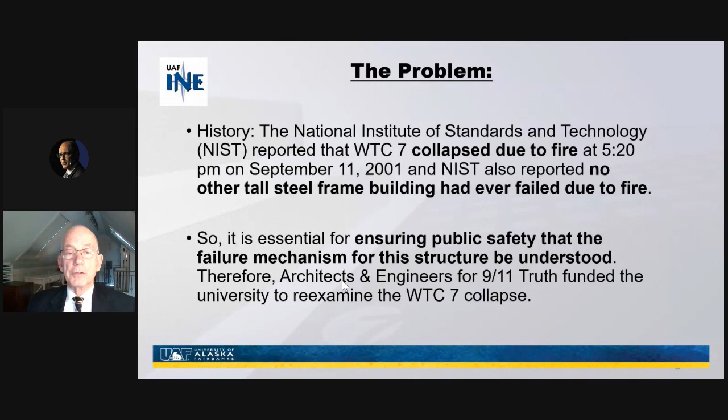So it was essential for public safety that we understand the failure mechanism of this structure. And since the NIST report said that it had failed due to the unprecedented event of office fires, Professor Hulsey understood that this was a matter of supreme importance for our profession. The science behind the study was first examine the fire loads, which were supposed to have caused the failure on floors 12 and 13, and then determine how the building was going to react to the thermal loads. And secondly, rule out scenarios that couldn't have caused the failure. And third, identify the type of failures and locations that could have contributed to the observed collapse.

He used the same material properties that NIST used in their report to ensure that the input values for the materials would be the same.

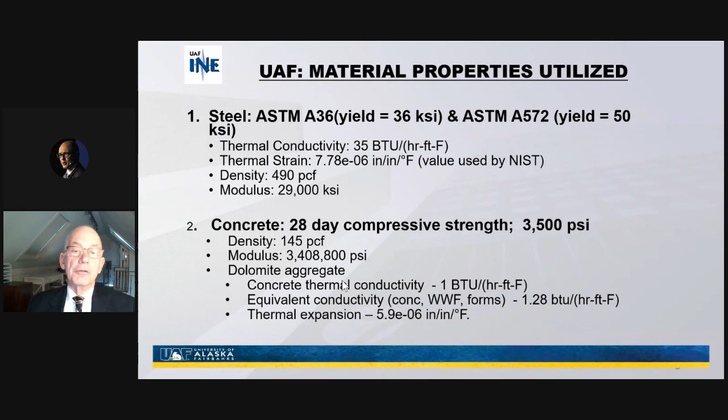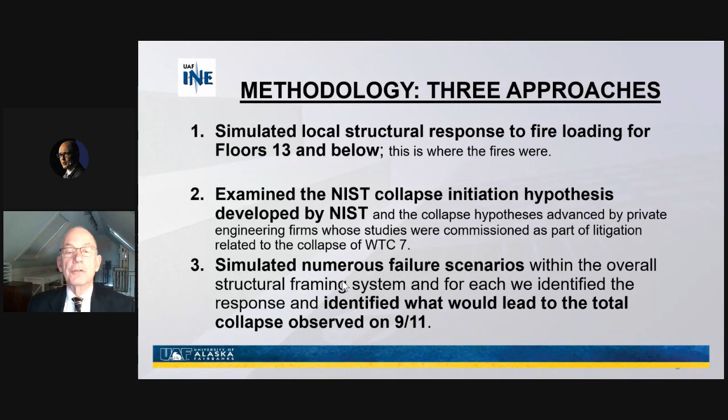First, he simulated the local structural response to fire loading to floors 13 and below, which is where the fires were. Then he examined the NIST collapse initiation hypothesis and the hypotheses advanced by the private engineering firms whose studies were commissioned as part of litigation related to the collapse of the building. And third, to simulate the numerous failure scenarios within the overall structural system that could have possibly led to the total collapse as it was observed.

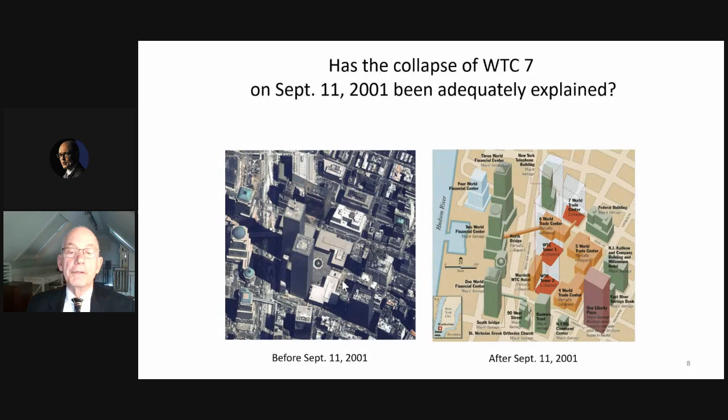The buildings and their relationship to one another are shown here: the towers, 1 and 2, the North Tower and the South Tower, and Building 7, which was a 47-story structure to the north of Building 1, about 350 feet to the north of the first tower. The reports that have been issued on the Building 7 failure are these.

The FEMA report, which was a preliminary assessment, was issued in May of 2002. Then NIST, which was given the power by Congress to issue a report on the cause of the failures, issued their report on Building 7 in November of 2008.

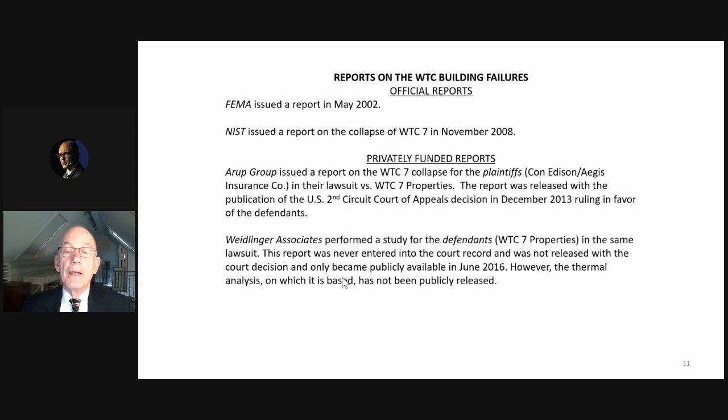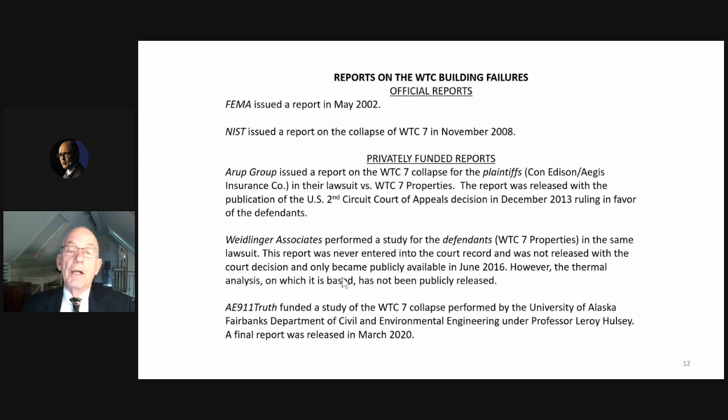Then the Arup Group was hired by the plaintiffs, Con Edison, as a result of the fact that the Con Edison substation, which was built underneath Building 7, was damaged. They sued World Trade Center 7 in 2010. Then Weidlinger was another engineering firm which defended the World Trade Center properties in that same lawsuit. Their report, however, only became available in June of 2016 without their thermal analysis. And then our report, which was issued yesterday.

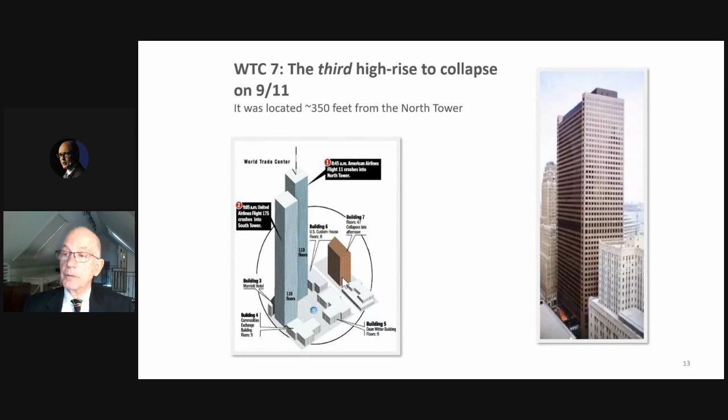The World Trade Center 7 building was the third high-rise to collapse that day. The location of the building was about 350 feet from the North Tower. It was 47 stories high. Each floor had about an acre of area. It was a trapezoidal floor plan.

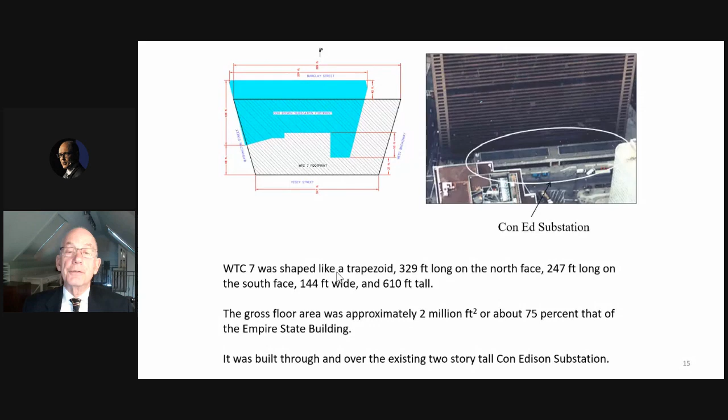The gross floor area was about 2 million square feet, and it was built through and over the existing 2-story tall Con Edison substation. It contained 82 columns in its floor plan, 58 on the perimeter, 24 in the central core.

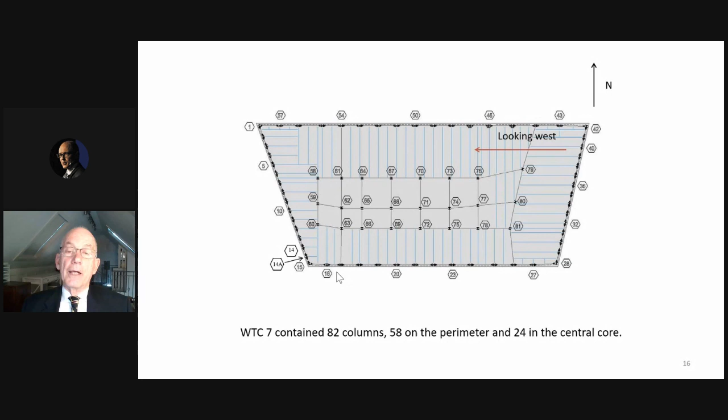We see that layout here. The area of interest is in the northeast corner of the building where the red arrow is. That is the area that NIST identified as the place where the initial event causing the collapse took place.

We'll take a look at that here in a photograph taken at the time of the construction of the building. Looking west from that corner, we see the girder of interest, which is determined to be called girder A2001 in the plans. And we see the beams coming in from the east side of the building, framing into the girder.

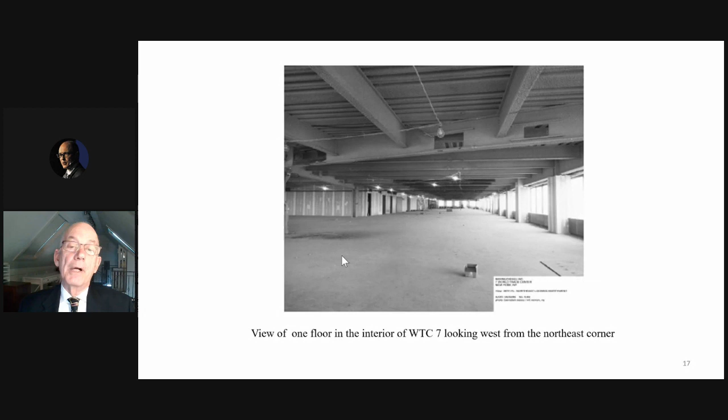This is a plan of the foundation showing the caissons supporting the Con Ed substation and the connections of the beams and columns of the World Trade Center 7 building to those caissons.

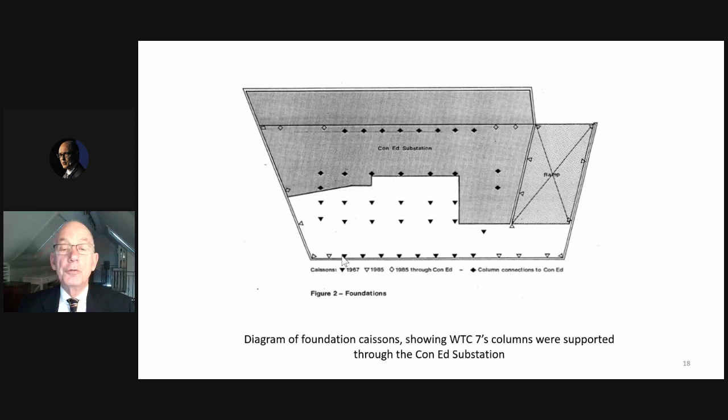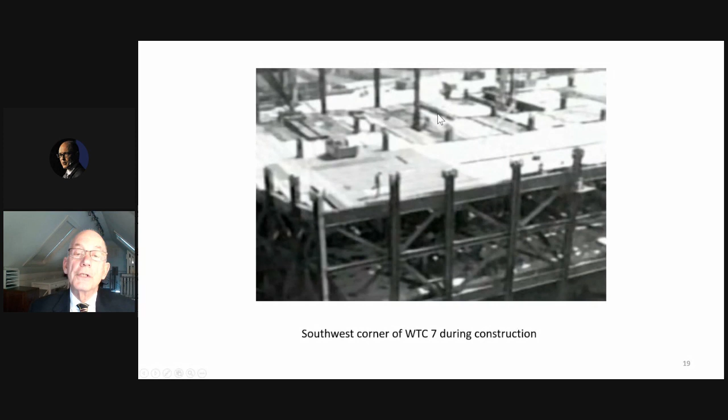A photograph taken during construction. We can see the perimeter columns here on the outside, the girders connecting those columns, the framing, and above that, the core columns coming up through the floors in the area of the elevators and the stairwells.

The 610-foot tall building, which was not hit by a plane, collapsed that day in the late afternoon at 5:20 and turned into a 5-story pile of rubble in about 7 seconds.

I want you to look closely at the top of Building 7 there. We see some areas here that contain heavy equipment for the climate control. This is the east penthouse, of particular significance, which we'll talk about later. This is the west penthouse. We're looking at this from the south. Pay particular attention to those features of the building.

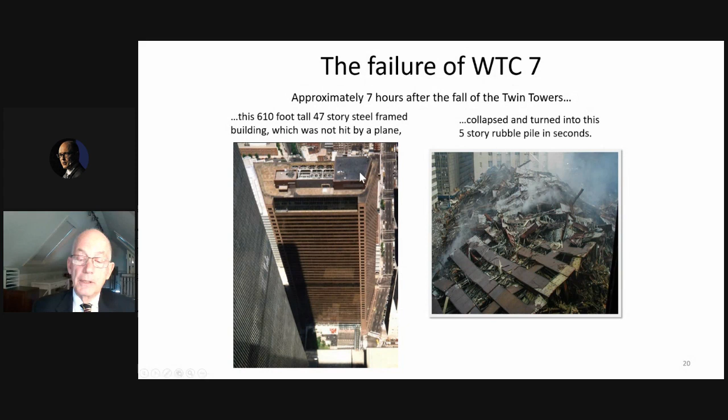Now we'll take a look at what it looked like when it came down. These videos start after the east penthouse had already collapsed, because if you look at the top of the building there, you'll see that the east penthouse has already disappeared through the roof. In all these videos, until we get to later in the presentation, you won't see the east penthouse because it collapsed first.

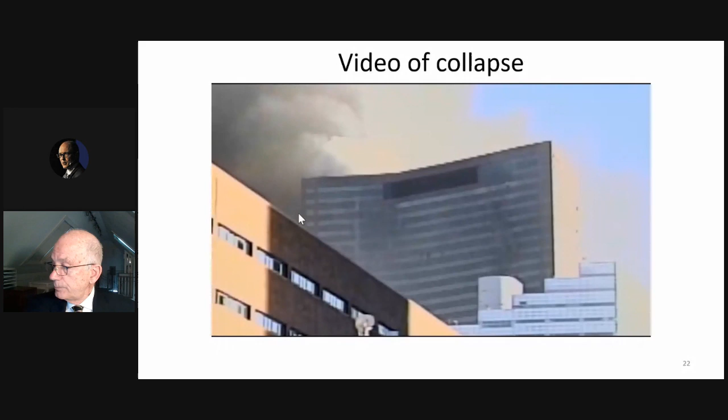For the third time today, it's reminiscent of those pictures we've all seen too much on television before, when a building was deliberately destroyed by well-placed dynamite to knock it down. Did they actually use the word brought down, and who was it that was telling you this? The fire department, and they did use the word: we're gonna have to bring it down. We heard this sound that sounded like a clap of thunder, a shockwave ripping through the building, and the windows all busted out. About a second later, the bottom floor caves out. The building followed after that, and we saw it crash down all the way to the ground. I turned in time to see what looked like a skyscraper implosion, like it had been done by a demolition crew. The whole thing just collapsed down on itself. It was almost as if it were a planned implosion. It just pancaked.

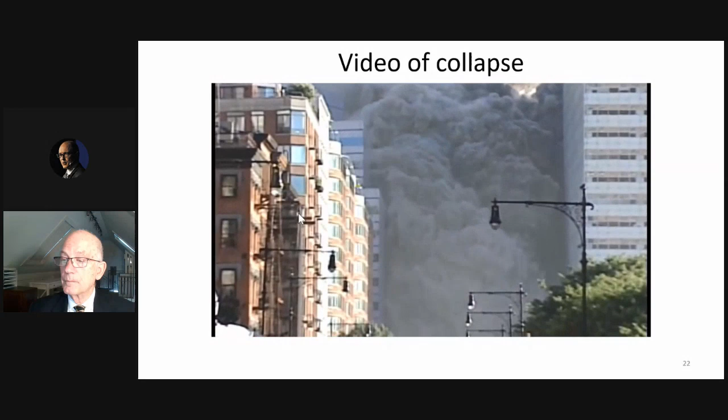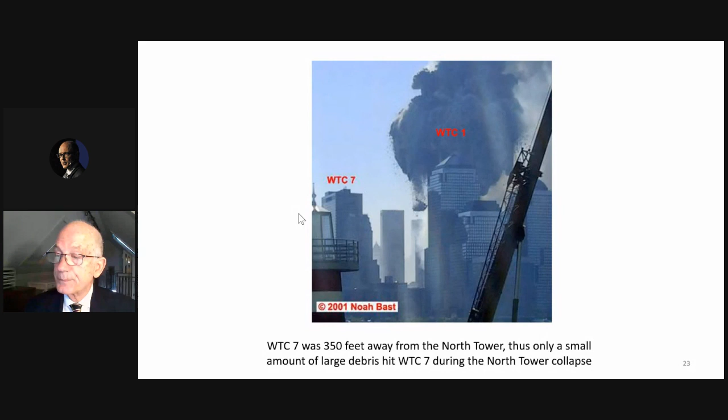Here you can see the relationship of World Trade Center 7 to World Trade Center 1, which is collapsing as this photo was taken. The debris pile from the two towers is shown here in a FEMA debris map, and we can see that World Trade Center 7 was hit by some light debris on the south face of the building.

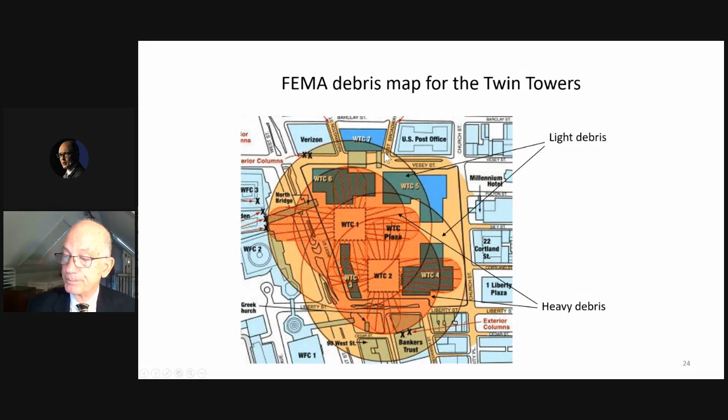Here's FEMA's, or NIST's, representation of that damage. The damage in the lower southwest portion of the building is the area where the fires started, and it was presumed that the impact damage caused those fires to start. However, NIST stated that the debris damage from the towers did not affect the collapse in any way.

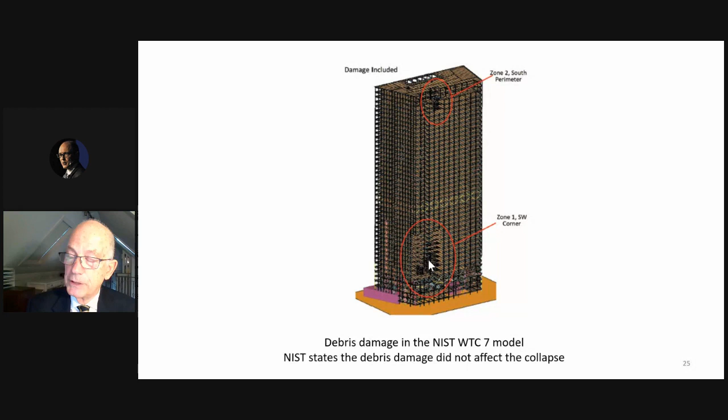The fires themselves, at first, FEMA thought they were maybe caused by diesel fuel in the building, which would be used for the backup generators. That was later disproved. Most of the diesel fuel was found in tanks underneath the building.

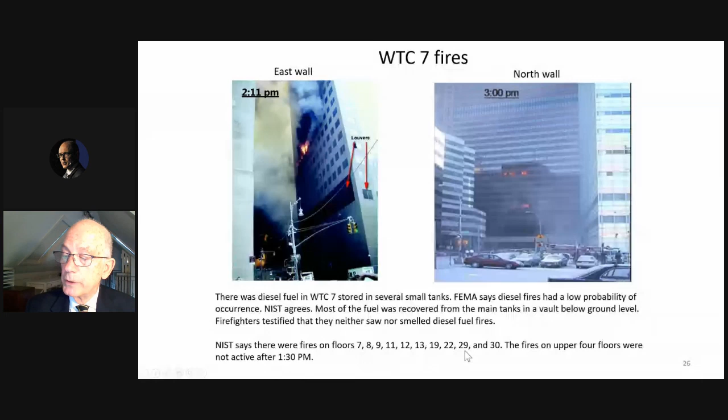We note, and we agree, that the fires of concern were on the 7th, 8th, 9th, 11th, 12th, and 13th floors. The fires higher up, on the 19th, 22nd, 29th, and 30th floors, were out shortly after they began. So the NIST World Trade Center collapse theory looks like this.

On floor 13, these 5 beams in the northeast corner of the building were heated by the fire. They pushed on girder A2001, which ran between column 44 and column 79, off of its seat—or in some scenarios, they have an alternative, which we'll discuss, maybe pulled it off. So they say it was either pushed off or pulled off its column seat at column 79.

That caused the girder to fall, and it hit the floor below, hitting the same girder underneath it on the 12th floor, breaking it loose. Fire damage also contributed to other beams in that area failing at the same time. That left column 79 unsupported because the floors cascaded down all the way to the 5th floor.

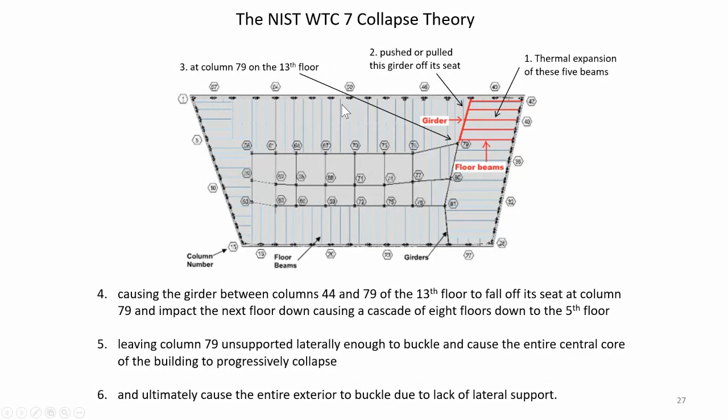So then you had a long unsupported column with a heavy load on it. It buckled, and that caused the entire core columns to fail in a progressive manner, which led to the failure of the perimeter columns, and that's what caused the building to collapse. So that's the NIST collapse theory.

They said it was all due to the office fires, shown here in this photograph. You can see the fires have burned on the 8th floor. They've apparently come in from the west, and they're burning in the central area of the building now. There were some on the 7th floor—you can see where the windows are busted out.

On the 12th floor, you can see the fires apparently started on the east side—here's the east side—here's column 44, and they've burned their way to the west. On the 13th floor, there are fires still active at this time, about 3:50 p.m., roughly an hour and a half before the building came down.

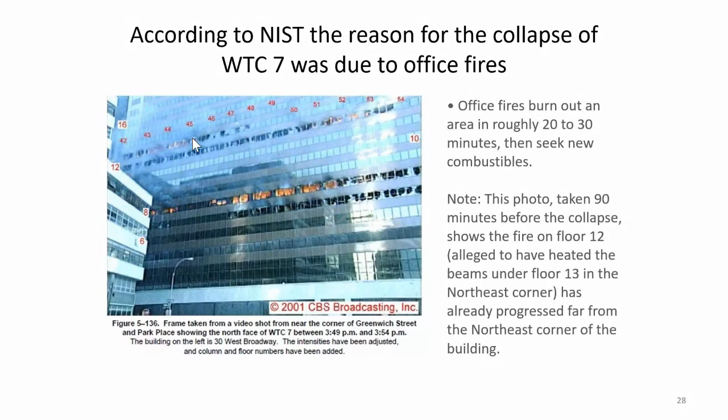According to NIST, that girder was considered to have lost its vertical support when its web was no longer supported by the bearing seat. The bearing seat on column 79 was 11 inches wide, so that when the girder end at column 79 had been pushed laterally at least 5.5 inches, it was no longer supported by the bearing seat.

However, the drawings showed that the plate was actually 12 inches wide, not 11 inches wide, and NIST later admitted that when they were informed of it.

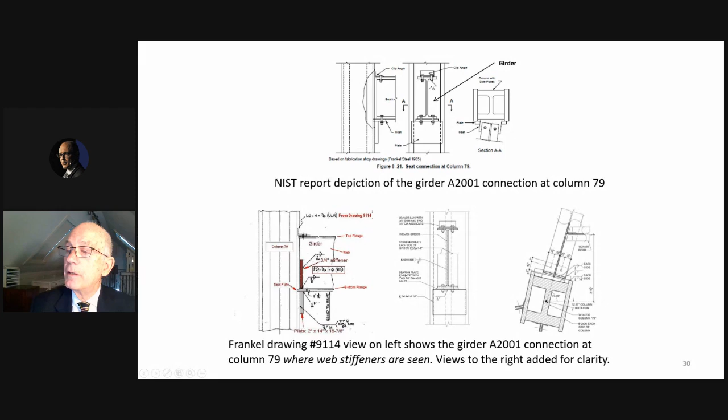Now, the NIST depiction of the girder sitting on its seat is shown here. We see the web of the girder sitting over the base plate, with some clips attached, and the plan view here shows the column with the girder coming in, sitting on the seat.

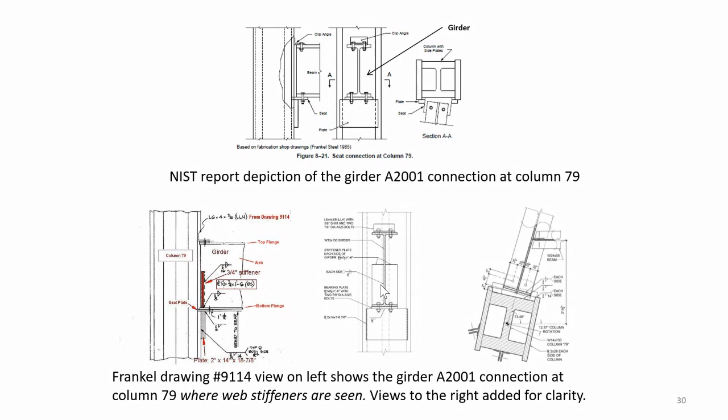However, there's a problem with their depiction: there were stiffeners welded to the end of the girder, welded to both the web and to the lower flange. This is the actual construction drawing—the Frankel drawing—that shows there were indeed stiffeners welded to the end of the girder. This makes a huge difference in their analysis.

This is a pictorial view of the same thing: the support plate, the base plate, the girder, the beams pushing on it, and the stiffener plates, which were welded to the web and the lower flange.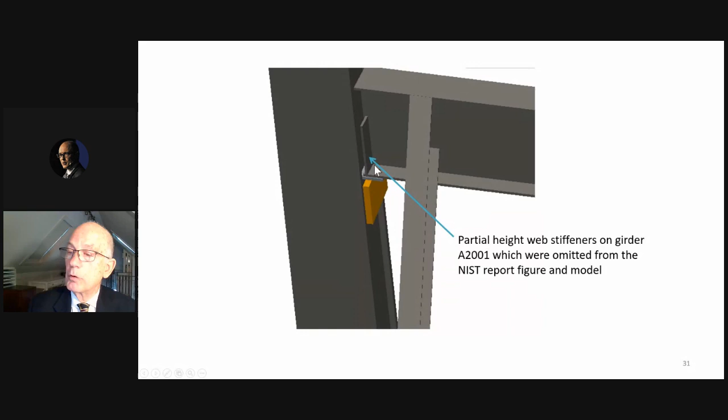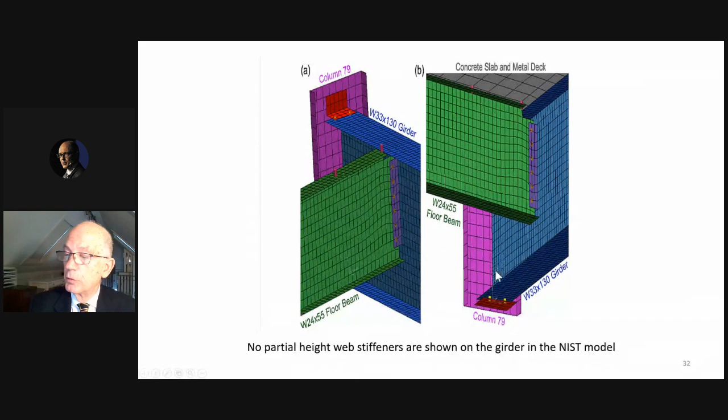In the NIST presentation, this is the beam, the girder, and the column—again, the girder and column here—and there are no stiffeners shown. They did not include them, but we know they were there. Construction photos show that they were there. This is column 79, with the beam, girder, and stiffener plate clearly shown in the photographs.

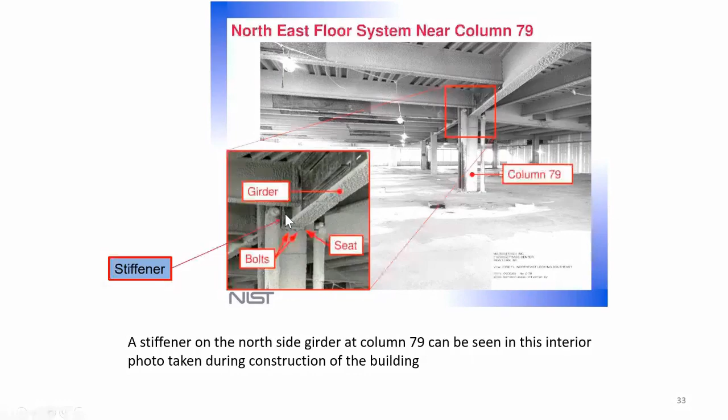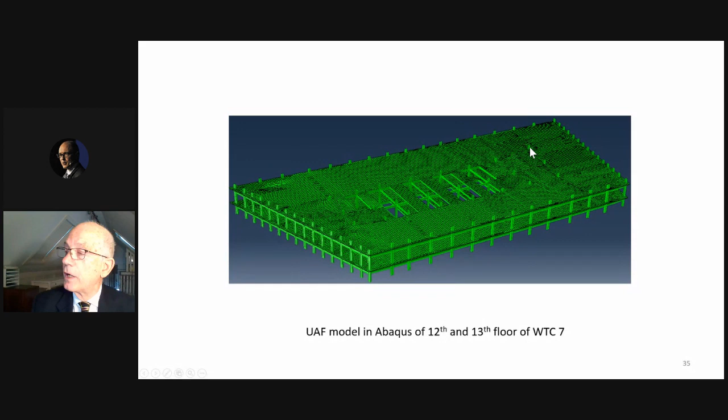Now, when Professor Hulsey and his crew did their finite element modeling of the building, they started with a model in Abaqus of the 12th and 13th floor. Here's the northeast corner, perimeter columns, the core columns, the elevator shafts and stairs, and here's column 79, located here.

Here's the UAF finite element model of that northeast corner of the frame. You can see column 79, column 44, girder A2001, the 5 beams that frame into it from the east, and the perimeter columns.

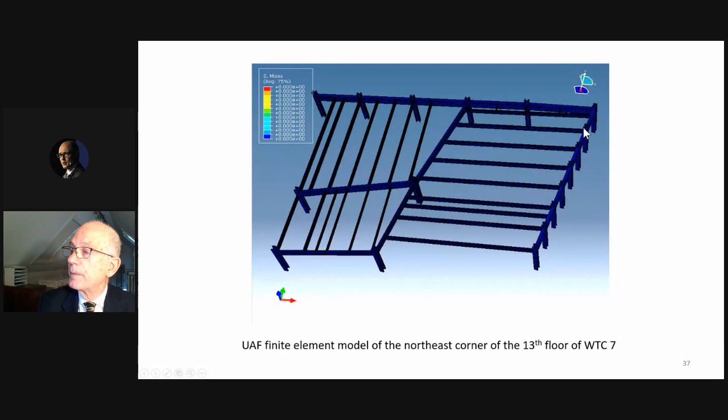The finite element analysis that they ran showed, here we're looking at the critical point, the point of initial failure according to NIST. This is the girder, the beam that frames into it next to column 79. Column 79 is not shown for clarity. We see the seat plate that was attached to the column, and the stiffener plate that supported it, the support plate. Here are the stiffener plates, which were welded to the web and to the lower flange.

The UAF analysis showed that even if we allow the beams to push the girder well past the corner of the support plate, the lower flange does not fold up and allow the girder to fall. This depiction shows the beam pushed well beyond what it actually could have, because in order to get the girder pushed that far, the UAF had to increase the coefficient of thermal expansion of the beam by 40%, which is unrealistic. But they were trying to get this girder past the seat to find out what happened. They found out the girder would not fall because the lower flange would not fold up.

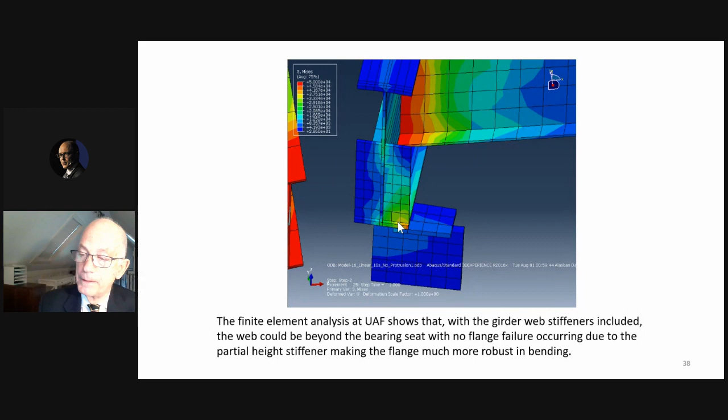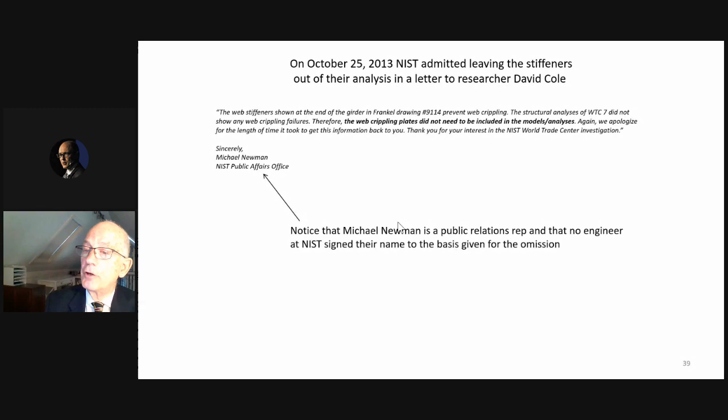This invalidates the initiation event that NIST says caused the entire event. NIST later admitted leaving the stiffeners off of the girder. One of our researchers, David Cole, sent them a letter, and they sent back a letter saying the web stiffeners shown at the end of the girder prevent web crippling. The structural analysis of World Trade Center 7 did not show any web crippling failures. Therefore, the web crippling plates did not need to be included in the models or the analysis.

This letter was signed by the head of their public affairs office, Michael Newman. Michael Newman is not an engineer. No engineer would sign that document, I'm quite sure, because they would lose their license if they went on record saying that the web stiffeners would not have any effect on the flange stiffness.

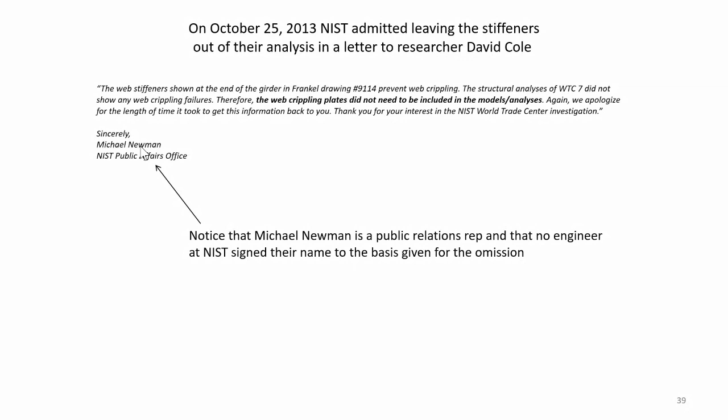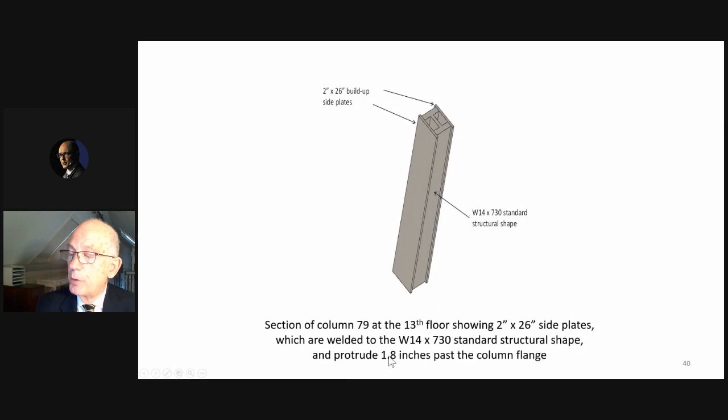Other problems are that column 79 and all the columns had built up side plates 2 inches thick that were welded to the column at every floor connection. They protruded 1.8 inches past the flange of the column. So when you heat the beams and the girder, NIST's model said the girder was heated to 500 degrees centigrade, therefore it would expand, pushing it up against the flange of the column.

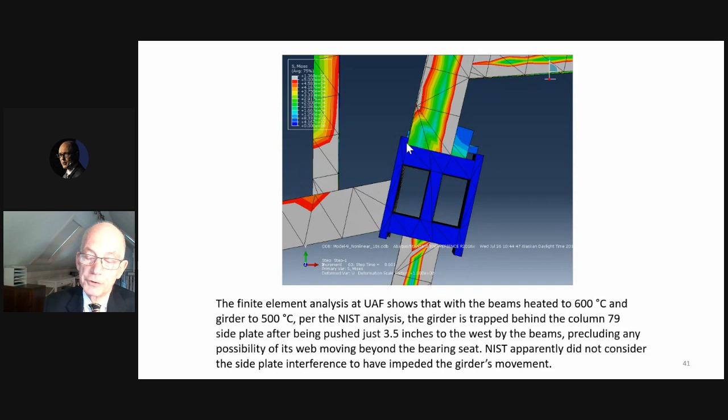And when the beam attempted to move it to the west, it would get trapped behind the side plates. For some reason, NIST, although they showed the side plates in some of their drawings, does not give any explanation for how the girder could have cleared the side plates and therefore come off of the support plate. So that is another serious problem with their analysis.

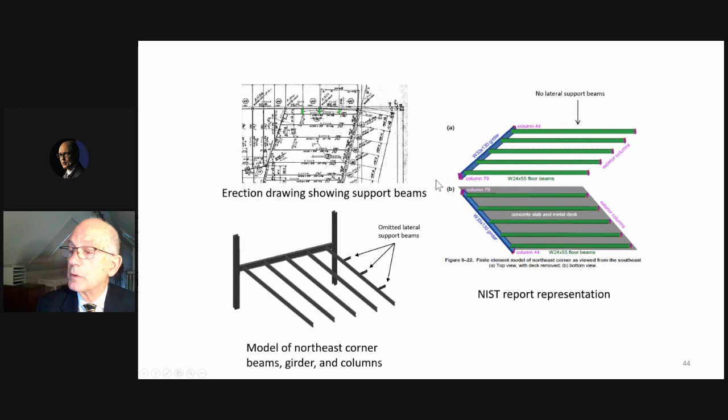Here we see another problem, that they left off these lateral support beams. Going back to the beams in the northeast corner, the northernmost beam had 3 stiffener beams that kept it from buckling between it and the exterior girder. So the NIST representation shown here, a bit harder to see, here's column 79, and these are the beams. This is column 44, and there are no support beams shown here. So even though there were 3 support beams, they were not shown in the NIST analysis.

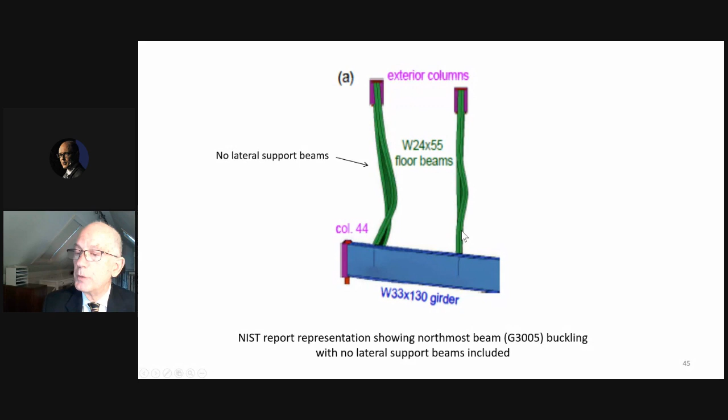What that means is that when NIST heated the floor, that beam buckled, and the other beams adjacent to it also buckled. The UAF report confirmed that if you left off these 3 beams, this northernmost beam would buckle when heated. I think the reason NIST needed that piece of information omitted is because they also claimed this girder could have been pulled off its seat at column 79, caused by the shortening of the beam due to buckling, and the cooling process would have perhaps drawn the girder off the beam to the east instead of pushing it off to the west.

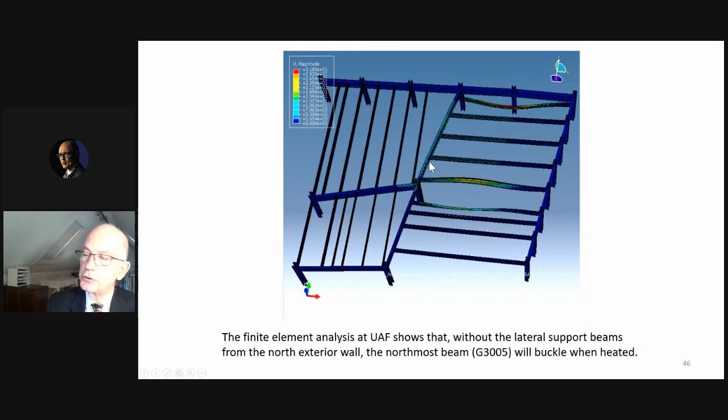The UAF analysis showed that when you left those 3 beams in there, the beam didn't buckle, and therefore the girder would not have been pulled off to the east.

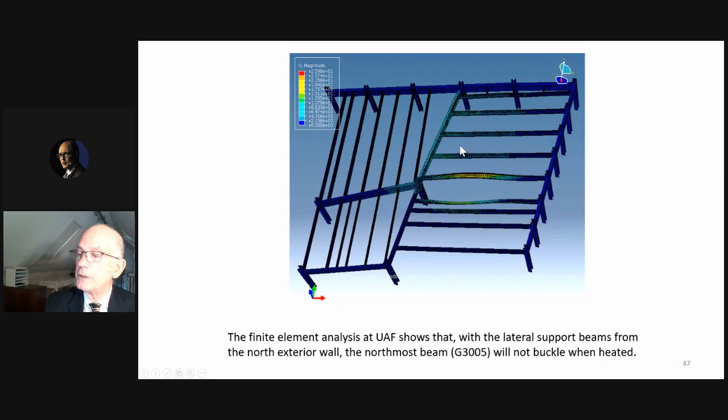But UAF went even further and said, okay, let's assume somehow that the girder could fall. What would happen then? NIST says the girder would fall down, hit the girder below it on the 12th floor, break it loose at its connection, and cause that section of floor to fall, leading to a cascade of floors all the way down to the 5th floor. That would cause column 79 to be unsupported for all floors between 14 and 5, causing it to buckle due to lack of lateral support. Now, the analysis everyone agrees with is that for this connection at column 79 to break, the impact force of the girder above hitting it would have to be 632,000 pounds. That's what it would take to break the welds loose and cause the 12th floor girder to collapse.

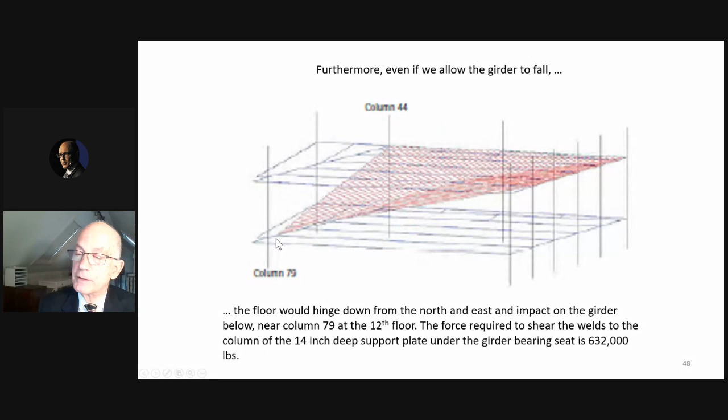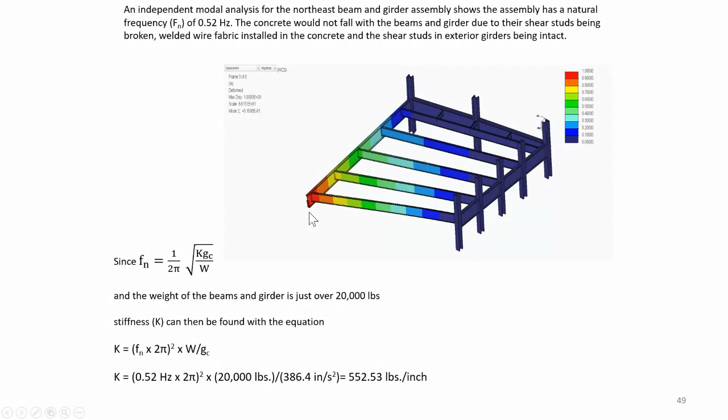So the UAF did a modal analysis of that framing section. Here we see it again, here's column 44, here's beam A2001, the 5 beams. They let it fall, let it hit the girder below on the 12th floor, and did an analysis. After figuring the stiffness, frequency, and running through all the calculations, which I won't reproduce here, they only got a force of about 62,000 pounds for that girder hitting the floor below. That's only about 1/10 of the 632,000 needed to break it. And if you heat it up to the temperatures NIST says it was heated to, that force is reduced to about 48,000 pounds.

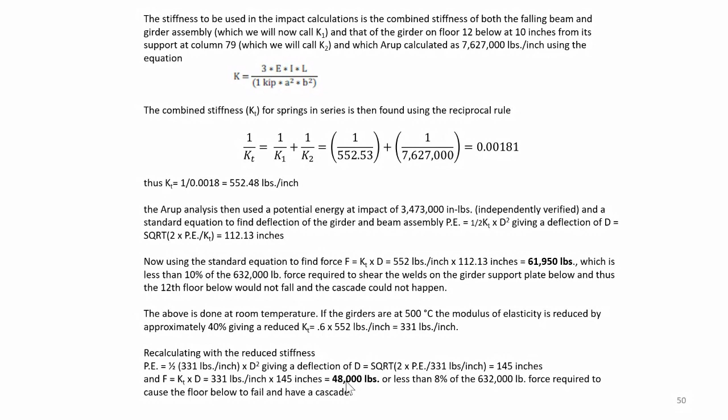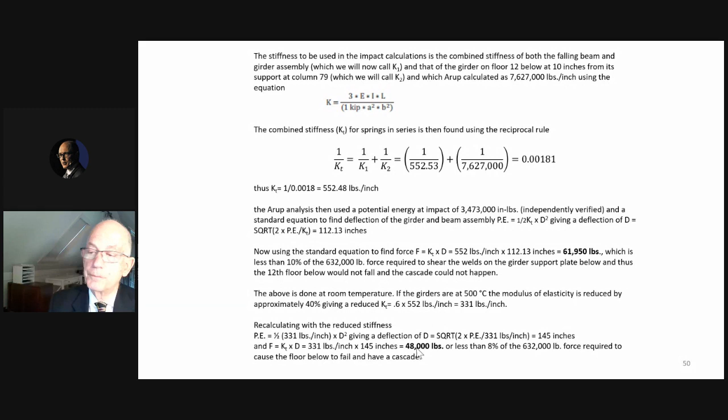So the conclusion is, even if the initiating event somehow could have occurred, which we know it can't, it couldn't have caused the next event in the progression. Remember, they claimed this was a progressive collapse. First event, girder coming off the column. Second event, the girder causing the girder below it to break loose. Both of those steps have been shown to be impossible.

Now, the linear static analysis that UAF ran took this scenario, the NIST analysis, and said, okay, let's go to the next step. We look at these columns and take them out, saying they buckled between the 14th floor and the 5th floor. Then we take out the next columns that they say collapsed next to them in the core, columns 76 through 78, and see what happens.

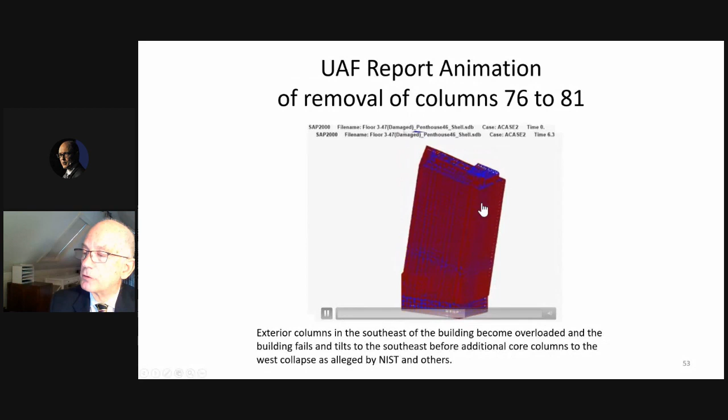What happens is this: the collapse of those 6 core columns overloads the perimeter columns in the southeast corner of the building, causing the building to collapse by tipping to the southeast and falling over. This would be what that looks like. So the collapse scenario, the third step in the progressive collapse NIST is proclaiming, would have resulted in the building tipping over and falling down, not falling straight down into its own footprint. Notice again that the east penthouse is still intact in that scenario.

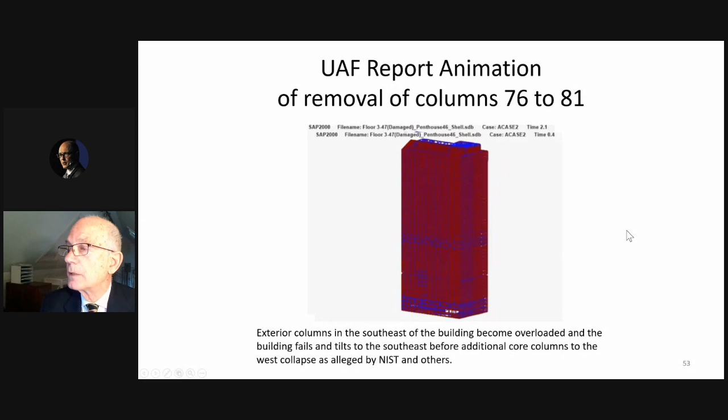Let's see if we can get this to move on. Now, the UAF also did a global collapse animation in which they tried to get the building to act as shown in the actual footage. This is what that looks like. The east penthouse collapses first, then the west penthouse, and shortly after that, the entire building comes straight down.

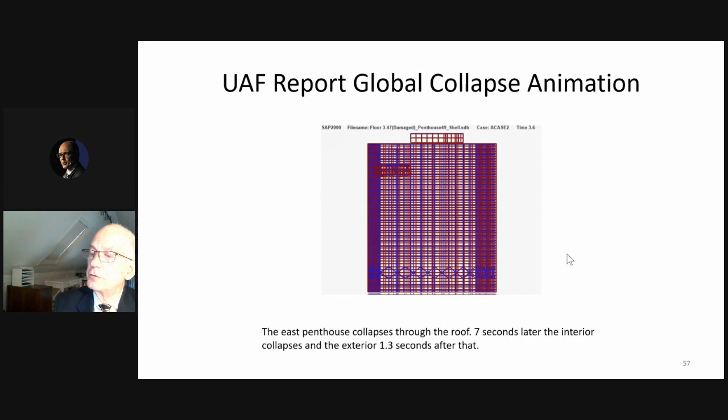The UAF finite element model was able to reproduce the actual collapse mechanism to a very close proximity. Here's another look at it from straight on, looking north. They only got this to occur by taking out all the interior columns over 8 stories low in the building, followed 1.3 seconds after that by the perimeter columns.

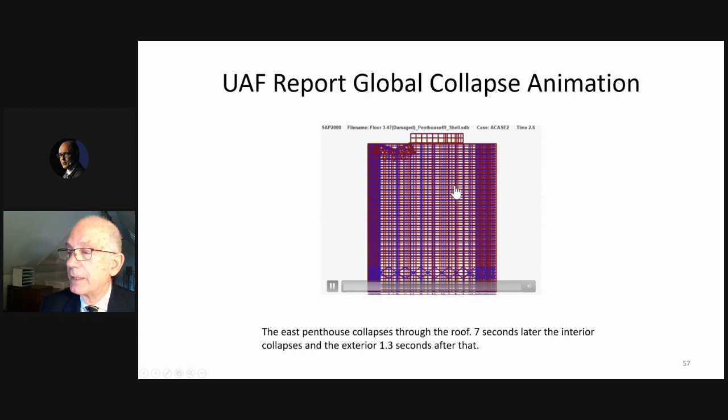That was the only way they could imitate the actual event. In addition, prior to that, they had to take out the 3 columns, 79, 80, and 81, high in the building as a separate event to get the east penthouse to come down first. Then the core columns caused the rest of the building to come down. So there's the upper floors under the east penthouse, then the core columns down low pull down the west penthouse and cause the entire building to collapse. That's the only way they could replicate what we saw.

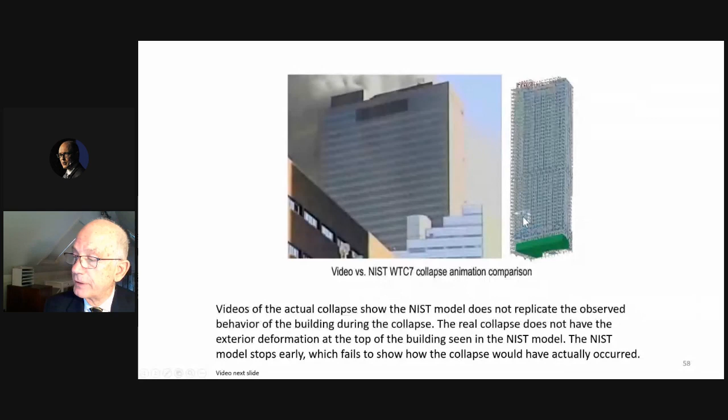Here we see a video of the event compared to the NIST model of the event. Here's the east penthouse, we're looking at this from the north. Same thing here. Down in this corner, you'll see the area that NIST says caused the event to occur, on the northeast corner of the building.

See there, this is their event, which they say pulled down the east penthouse and caused the building to collapse. Compare with what's happening on the left.

Notice the distortion of the building in their model versus the actual event.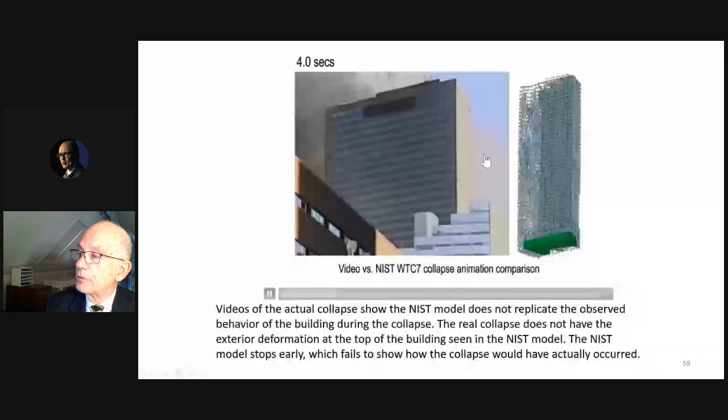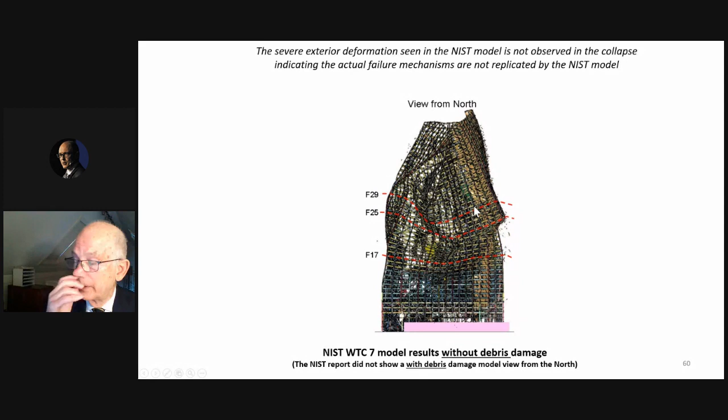The NIST model also stopped about 2.8 seconds into the actual collapse once it began to collapse, and they never show the rest of it. This is a picture of what their model would have looked like a little further down the line, which shows that the top of the building swings around at more than 90 degrees to the central axis of the building, and clearly doesn't look anything like what the actual event looked like.

The question of free fall acceleration was brought to the attention of NIST when a physics teacher, David Chandler, using a video of the event, proved that the entire roof line was in full free fall acceleration for about 2.5 seconds near the beginning of its collapse. NIST was confronted with this fact and they were finally forced to admit it, but they never looked at the implications of that free fall.

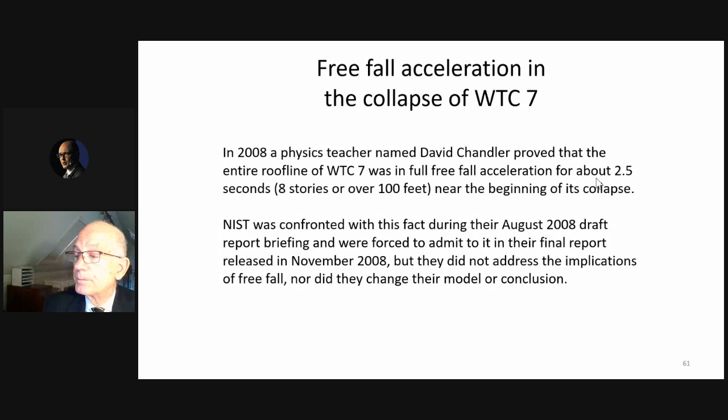Here's what a graph of the collapse looks like. You can see this is the velocity, the time. For about the first three-quarters of a second, it started to descend. Then it went into free fall. This is the slope of free fall acceleration, and it followed that for about 2.5 seconds. And then it began to slow its descent as it encountered resistance from below.

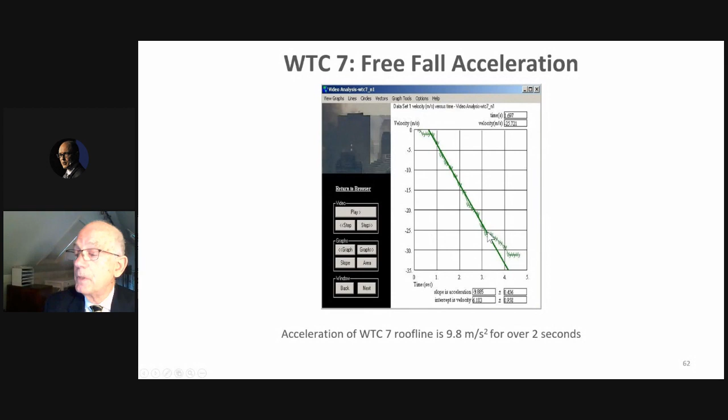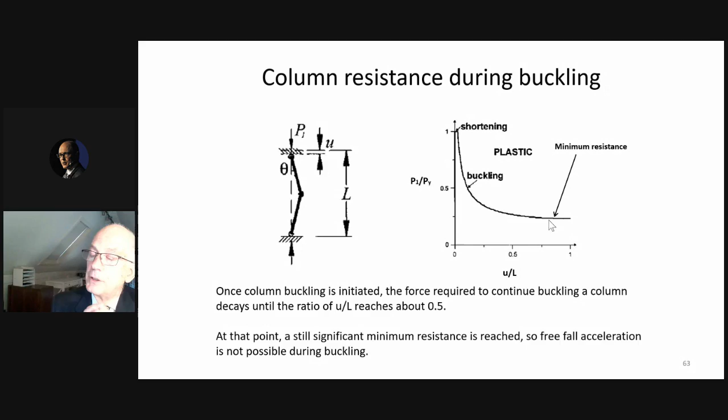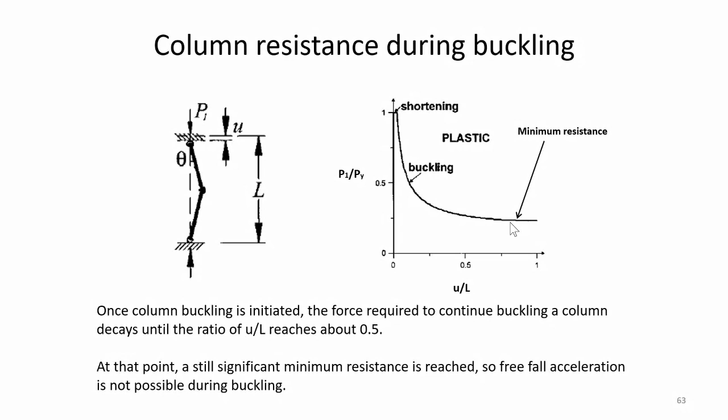Now, if the column resistance had been actively activated by the collapse of the columns as NIST theorizes, when you buckle a column, the resistance trails off to about maybe a third of its total strength after the column has collapsed to a great extent. What this means is that the columns will always give some resistance to the collapse of the building. So that means that their model cannot account for free fall at all. So free fall is another fatal error, proving that their mechanism could not possibly account for what happened.

In free fall, all the potential energy is converted to kinetic energy, and there's no energy left to do any other work. So the upper part of the building, if you took out 8 stories, could not have been crushing that portion of the building. So those columns were not available to give any resistance.

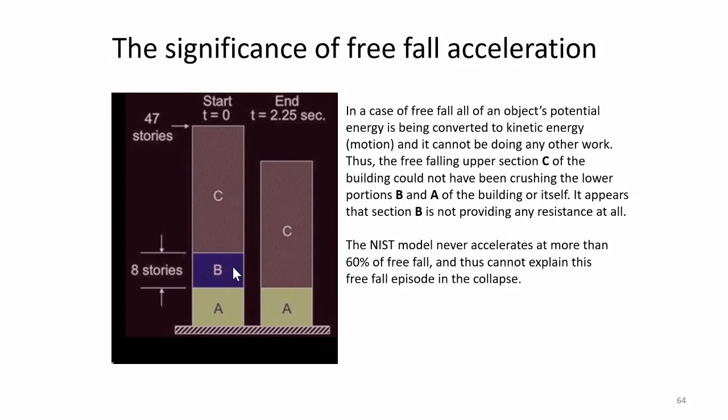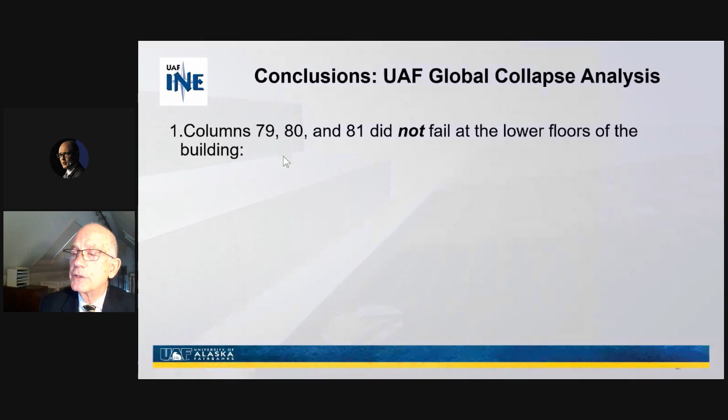So looking at the conclusions of their collapse analysis, we see that columns 79, 80, and 81 did not fail at the lower floors of the building. And in order to cause the east penthouse to fail first, while not having any deformation of the exterior, these columns had to have failed only at the upper floors of the building. But there's no documented fires above the 30th floor, so that is impossible from their perspective.

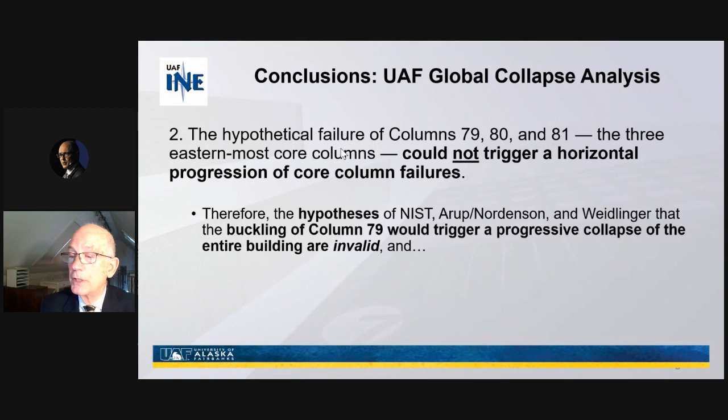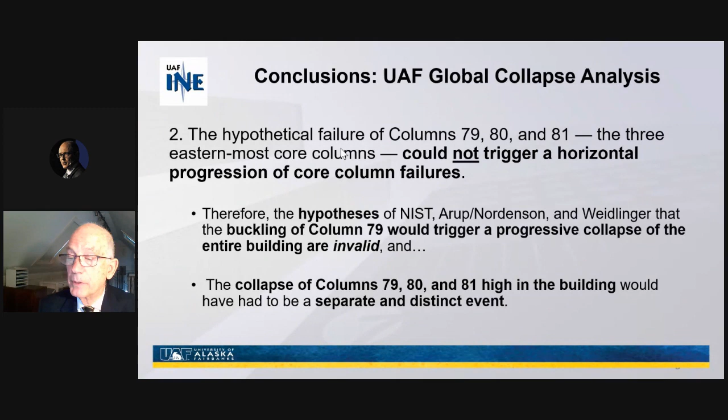Secondly, the hypothetical failure of 79, 80, and 81, the three easternmost core columns, could not trigger a horizontal progression of the core column failures. So the hypothesis of NIST and the Arup and Weidlinger reports that the buckling of column 79 would trigger a progressive collapse of the entire building are invalid. And the collapse of columns 79, 80, and 81 high in the building would have had to have been a separate and distinct event.

If we assume that the failure of columns 79, 80, and 81 could lead to the failure of the next row of core columns, the additional hypothetical failure of those 3 columns, 76 through 78, would then overload the exterior columns around the southeast corner of the building instead of overloading the next row of core columns to the west, and that would result in the building tipping to the southeast, not in a straight down collapse.

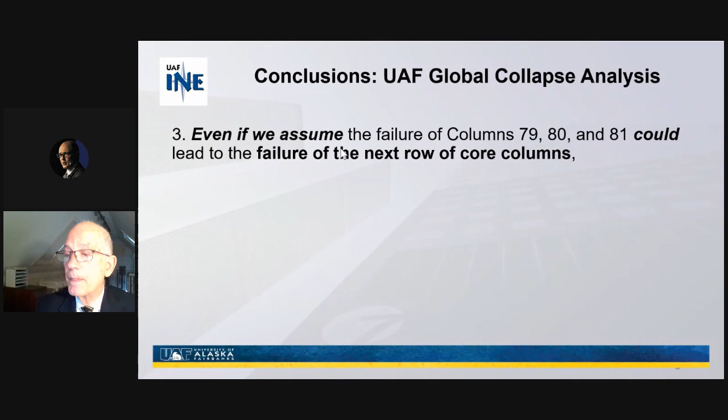And here is the conclusion that is most revealing and definitive for our purposes, and that is that the simultaneous failure of all core columns over 8 stories, followed 1.3 seconds later by a simultaneous failure of all exterior columns over the same 8 stories, produces almost exactly the behavior observed in the videos of the collapse. That collapse could have started at any of the various floors, starting at floor 16 and below, and produced the same behavior. So here we have definitive proof that the observation that most people make when they see the building collapse, that is, it looks like a controlled demolition, is validated by the study showing that a progressive collapse was not possible. It had to be an almost simultaneous event, which could only be accounted for by a controlled demolition event.

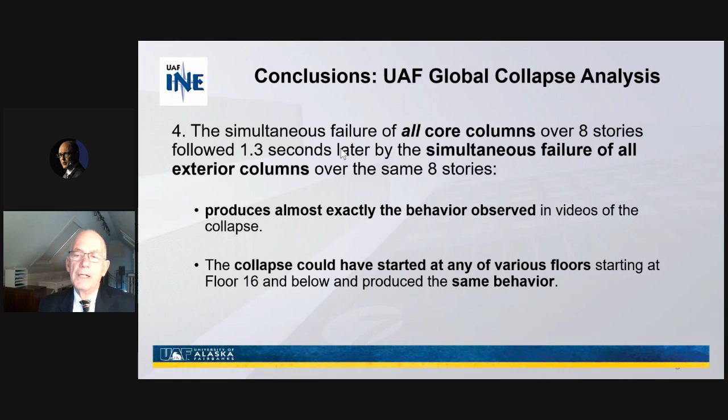So this proof here, together with the preceding proofs that the progressive collapse could not have occurred, is fundamental to our claim that we need to have a new investigation of the building's collapse.

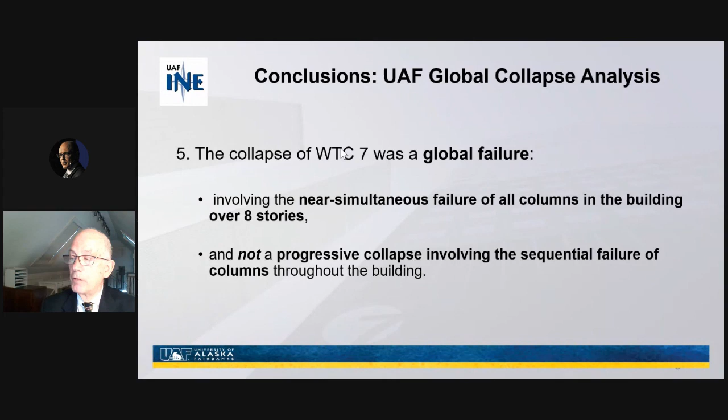Lastly, the conclusion that the UAF study made was that this is a global failure, that it had to be near simultaneous failure of all columns in the building over 8 stories, and not a progressive collapse involving sequential failure of columns in the building. And despite the UAF team's simulating of a number of hypothetical scenarios, they were unable to identify any progressive sequence of failures that could have taken place that would have caused a total collapse of the building, let alone an observed straight down collapse with approximately 2.5 seconds of free fall and minimal differential movement of the exterior.

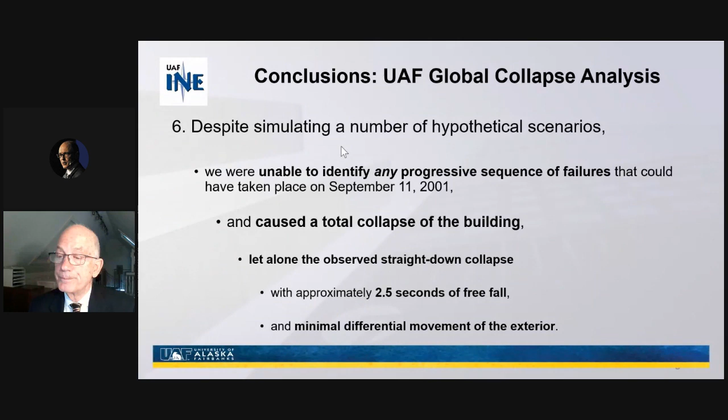So at this point, I would like to thank you for your time and joining us today to see this webinar about our report, about the UAF report that was released yesterday. And I want to call on all my engineering colleagues and our building professionals in all fields to join us in demanding a new investigation into the collapse of this building. The NIST report does not explain it. The UAF report gives us the evidence that we need, rigorous scientific and mathematical proof that the only way that building could have been brought down was by controlled demolition.

And we, as building professionals, need to make it clear that the event that we have been told was caused by a progressive collapse that day due to office fires did not occur in that manner, and we are not going to support that report. We need a new investigation, and we need to have it conducted in a scientific manner. And we call on all academic engineering departments to follow this study, to assign their students to study the differences between the NIST report and the UAF report, and to join us in calling for a new investigation. And I want to thank everyone that has participated, especially Dr. Hulsey and his team, and the many other volunteers that have helped us bring this information forward at this time. We have created a milestone in our progress towards a new investigation today. Thank you.